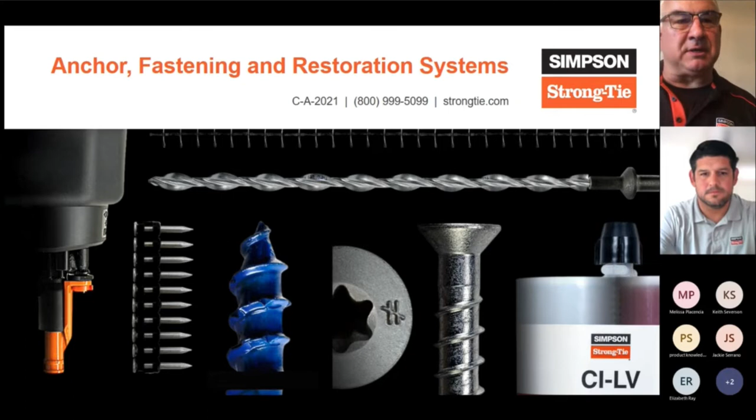But what we're going to do is just kind of show you what's been going on, and then tell you a little bit more about what Simpson's doing and how that helps your customers. So go ahead, Jeremiah.

So, new products for '21, '22. You probably know a lot of these. Some are going to be familiar, like our adhesives and our Titen HDs, but there are new versions that I want to go through, and where we can use those types of products. Some will fit into the scope of your customer's work, some may not, but that's okay. We want to make sure we cover the products so you guys know what you have.

So just a little screenshot of some of the new things. For the adhesive anchors, we came out with a newer OptiMesh adhesive screen. That type of product is used in red brick or in concrete block. I'm not going to get into that one so much today because it deals with one of our newer adhesives, Set 3G, and we don't really have any of those available yet, but it is something that's going to be a newer product.

But we're going to talk about the Titen Turbos, the Titen HD countersunk screw anchor, the Titen HD stainless steel countersunk screw anchor, and the washer head screw anchor. As you can see, there's a lot of different types of Titens coming out, and I'll get more into why we're able to do that in a second.

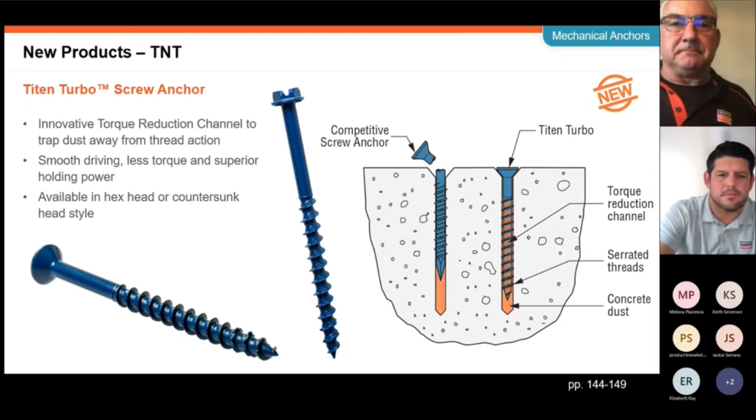They developed this to be very similar to the Titen HD, and it worked great. It really, at first, worked great. But what we found, even if we gave it a little room at the bottom like we would normally do with the Titen HDs, we had issues with the head snapping off. So we knew we had to do something different.

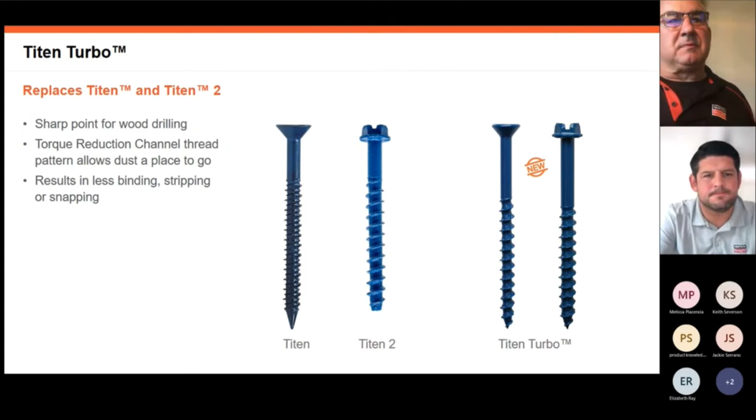Before we go, is there any questions on the Titen Turbo?

Okay, so Titen HDs have been around forever. They're probably one of the most versatile anchors that we have in our line. It can do just about anything and anchor just about anything.

I think the smartest thing that Simpson Strong-Tie did is they made an anchor where we can adjust it for the needs in the industry and adjust it to what our contractors need. So the original style of the Titen HD has a hex head on top. You drive it down, done. A lot of use in the residential market is going to be your sill plates.

If you miss an anchor these days, you can't necessarily use an epoxy to put a new threaded rod in, but you can use a Titen.

So from that, we've decided, well, what about this and what about that? What about these applications? So now this is a countersunk head, and you can see in that picture just what this anchor is designed to do: for applications that require a flush mount profile.

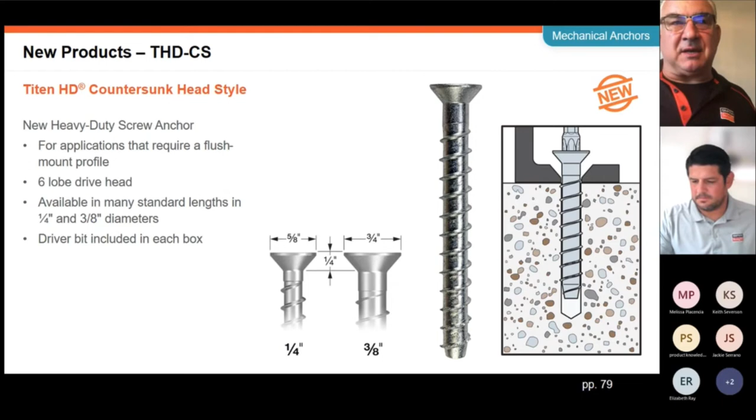We also have it in stainless steel. Now, this isn't only the countersunk style head style, we have Titen HDs in the 316 style in all versions. And we did that because a lot of fencing companies and other companies that do a lot of outdoor work, railings, like you can see here, outdoor type of exposure - we had the mechanically galvanized version, but that was only allowed to be used in a temporary situation. So we moved ahead with the Titen HD stainless steel.

Basically what I want to point out here is you see the bottom of that anchor where that discoloration is - that kind of looks like rust, but that's not rust. The thing with the Titen HD and being able to cut the way it does, when we came out with the stainless steel, it needed to be able to cut and have the holding power and values like the standard Titen HD. We're able to do that with this because those bottom threads you see there, those teeth will cut. That is a ring that they braze onto the Titen itself, and those three threads there are made of carbon steel. So that's going to do the cutting because stainless steel is soft.

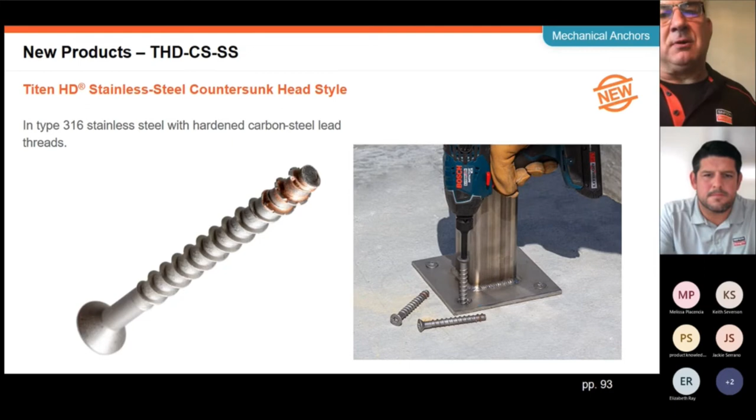So the last thing I'll say about the Titens - these are all cracked concrete approved. Cracked concrete, to not get too deep into the weeds with it, is the ability, when an anchor is tested for that, to maintain your strength even if a crack has occurred in a seismic event or an earthquake and it happens to intersect that anchor and go right through it. So when we do our testing, we actually crack concrete and then put these anchors in and then move the concrete manually or with hydraulic presses. And then we pull test these and apply tension to them to see how they're going to hold. These anchors do very well in those types of tests.

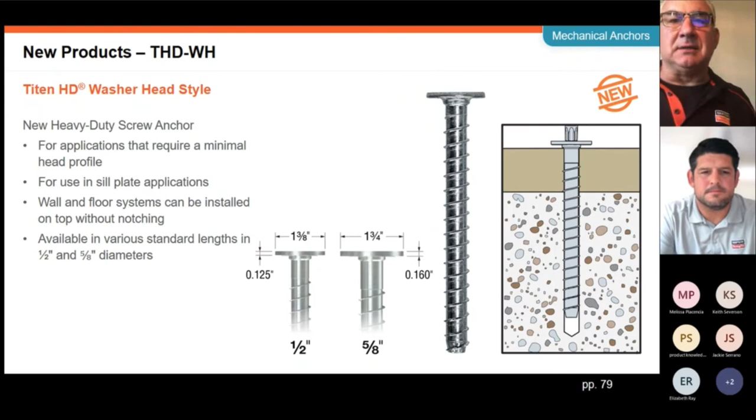So the body of the anchor itself is what's tested. The head can be anything that we want it to be. And that makes the Titen HD very versatile, because as you can see, all these different style heads are coming out, but the body of the Titen is basic and remains the same. So that's why it's one of the most versatile type of mechanical anchors out there, which means the threading mechanically cuts into the concrete. So any questions on the Titen HDs?

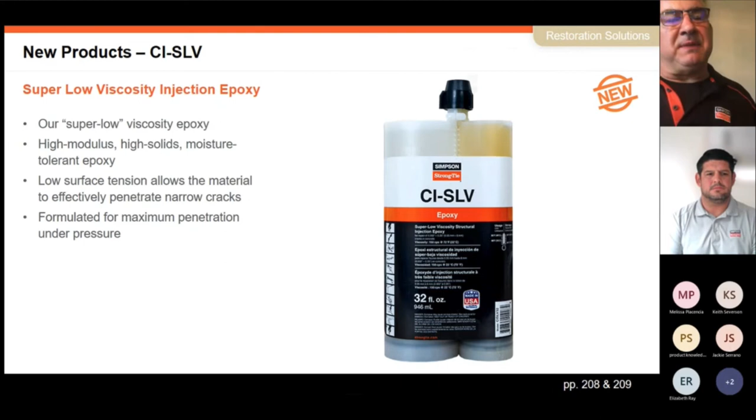So this is really going to flow out really nice, really quick. If you poured like mineral oil onto the concrete, it would just flow out very quick. Well, that's what this is like. This can be used for a lot of different types of work, like I told you, small cracks, fine cracks. But if there's an area with a bunch of cracking, it can also be used as what's called a flood coat, where they take the 3-gallon containers, dump them out, mix them up, and then pour them on the concrete and squeegee them into the cracks. So this is a very versatile product for us. It is structural, and it allows that type of work to get to those finer cracks that need to be fixed.

Just the next one now, this is just an LV - low viscosity - and this is very much like a vegetable oil. When you look at the consistency of that, that's the way this will flow. A little bit thicker. It does work in multiple types of cracks, and it'll also work as a flood coat.

The interesting thing about this product is that it's NSF ANSI Standard 61 approved. What that means is that if there's any application where water might hit, or potable water, this will not affect the water at all. So that's a big deal when you're working on a slab or in an environment where there might be a creek close by, or water comes through the area, or the groundwater itself isn't very deep, running underground. They can use this product, and if it happens to migrate down to the dirt, which sometimes cracks will go all the way through a slab, that's okay - it's tested and approved for that NSF Standard 61 approval.

But again, these products will chemically bond the concrete together, and they're also moisture tolerant, as it states here. So it is a great product, and it can be used in both damp and dry applications.

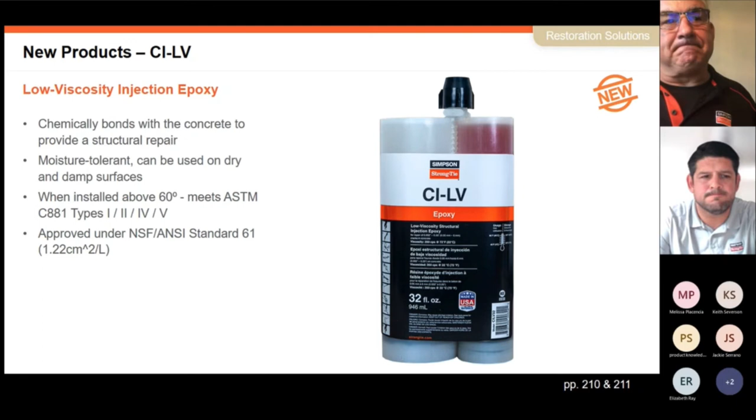This is just the low viscosity like we just discussed, but if it gets cold, a lot of times epoxies don't want to play when it gets cold - they will sit there and take a very long time to cure. So we have this option when it starts to get colder, like we're getting into, where you can use this and have it perform just like the low viscosity does, but at like a 70-degree mark this will do it at a much lower temperature and still cure at the same time.

One of the most important, and most expensive things on a job site is labor. So when guys have to wait to do a project, or wait till it warms up, or have to heat the concrete to do these applications and fix these types of cracks, that takes time. Having a product with a faster set is a real benefit to the system and to the customer.

On the flip side, LPL is a long pot life, which gives us the opportunity to use this at higher temperatures. You can see in the second bullet point that it's suitable for temperatures between 60 and 110. Out here in the valley, I'm in Discovery Bay, it gets a little toasty out here, and it certainly did this summer. But still, up to 110, there is a limit.

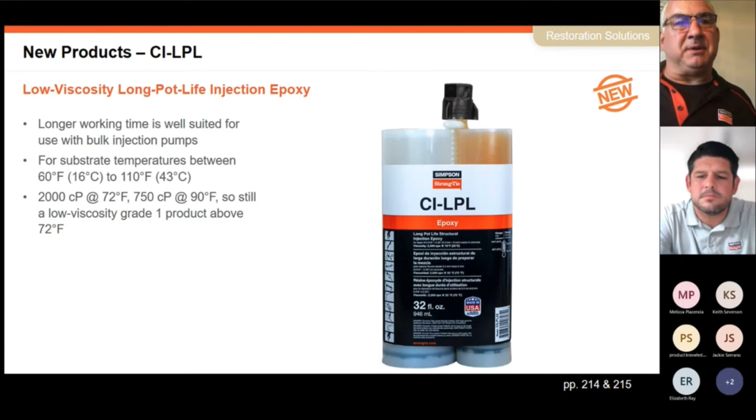Then this is the GV. This is just like your epoxy, your regular doweling epoxy. It's not going to sag. You put it on a wall, horizontal crack, or ceiling. You can actually inject this product even though it's thick, and all these products can be pressure injected through ports. It doesn't have to be just on a slab. You can dispense it over the crack and have it soak down and fill up, that's called a gravity feed application. But you can also seal the crack over, put injection ports on, and pressure inject this into the wall or slab or whatever crack you're trying to fix. This one is a little thicker, so you can do more with it in the sense of fixing larger openings and larger cracks that you can get to and fill up without having to use a port.

It can also be used as a pick-proof sealant. That's a big deal. When you lay down a sealant to seal anything, you don't want it to be able to be kicked out if someone hits it or things like that. You can't dislodge it from that crack, it'll stay put and keep the crack sealed.

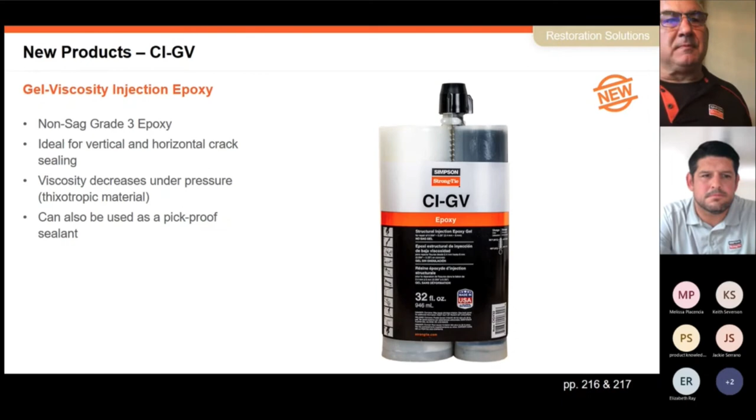Now we're going to get into the epoxies that have really evolved over the years. The first one, and I'm using this as the phase-out to go off of, the AT that we had for so many years is our acrylic tie, methyl methacrylate is what they call it, AT is easier. This is a cold weather product, and that product has moved over to ATXP. One of the major differences between the two is ATXP does not smell.

AT had a very, I don't know how you'd put it, it smelled bad. So we reformulated it and moved it over to ATXP.

ATXP can be used down to 14 degrees, but because it can be used in that cold of a temperature, you've got to be careful when you use it in hotter temperatures because it'll cure very fast.

So this will fully cure at 14 degrees in an hour. The other epoxies that we have will fully cure at 70 degrees.

Let me take that back. It'll cure at 14 degrees in 24 hours, and the other epoxies cure in 24 hours at 70 degrees. So that's the difference between the two.

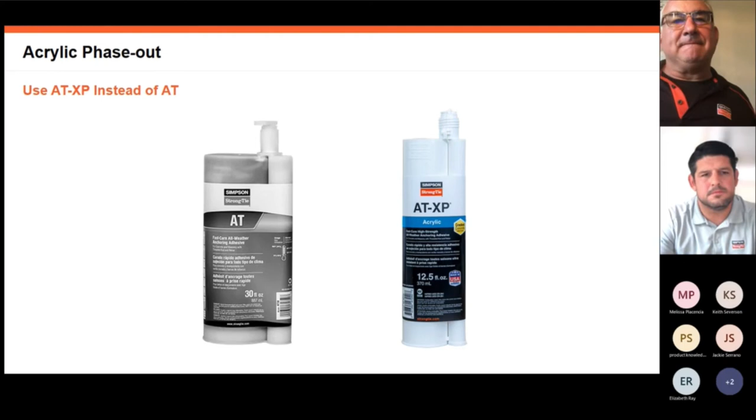You remember Set adhesive? Set adhesive went away a long time ago. I love Set adhesive because it did everything we want to do, on every substrate possible.

Now we went to Set XP and now 3G. The difference between the two: Set XP is a structural product like Set 3G, but Set XP can be used on concrete and also in CMU, in concrete block.

We have that in our code listing. We also have it in our catalog. If you look through it, you'll see little icons that show where these particular products can be used.

The curing time is very similar between the two, so there's not much difference there. The Set 3G is standard.

It's mostly just concrete, and this is the product you'll see specified, or your contractors will see specified, if it's overhead applications. For the most part, it's a little bit more grainy, a little bit heavier set.

So it holds in the hole better. But this is a stronger product than the Set XP.

But we are doing testing with Set 3G on concrete block as well. So these two will be very similar down the road, but we still see a lot of specifications for Set XP.

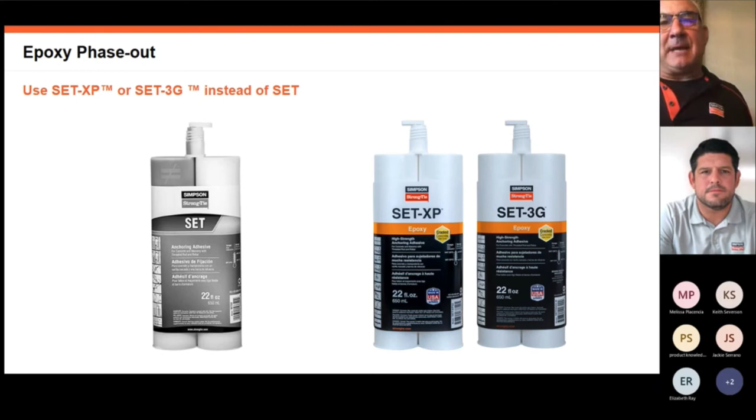What's great about the estimator, the ACE, is that it'll give you quantities for the whole system. Simpson's really big on going in and selling a system, so you need this part, this part, this part to get it done. When your customer uses this, or you want to help them walk through it, you'll be able to tell them how many ports they need, how much paste over they need, and how much crack injection material they need. And it's quick.

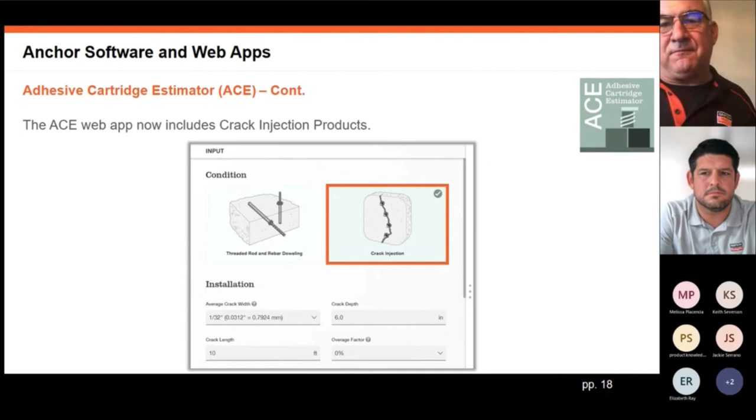So real quick, we kind of mentioned it a little bit—Simpson switched gears a little with what we go after and how we spend our day and what we're focused on. Now we talk about market segments: light frame construction, retrofit and repair, water, wastewater, bridge and marine, manufacturing, and cold-formed steel. These are the focus for where we're headed on the commercial side, but a lot of this also involves the residential side as well, because we go hand in glove with a lot of these types of projects.

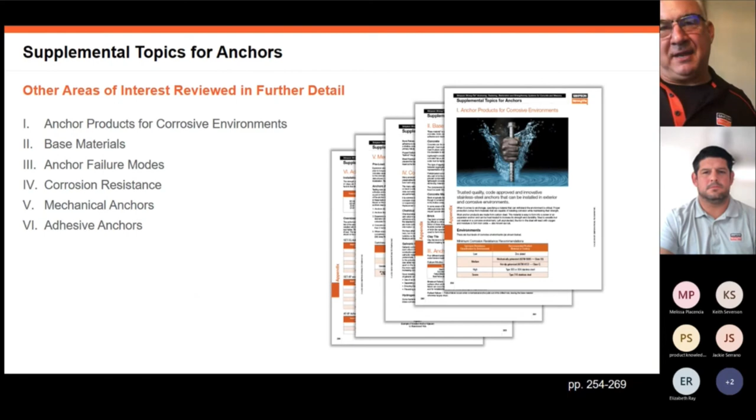We are available at any time to do job site calls or anything like that. We also have a series of trainings we can do to make contractors a trained installer—powder actuated, crack injection, adhesive trainings now. A lot more emphasis has been put on those types of trainings by the engineers when they specify products, so we're able to fulfill that need for your contractors if need be. Go ahead. Any questions?